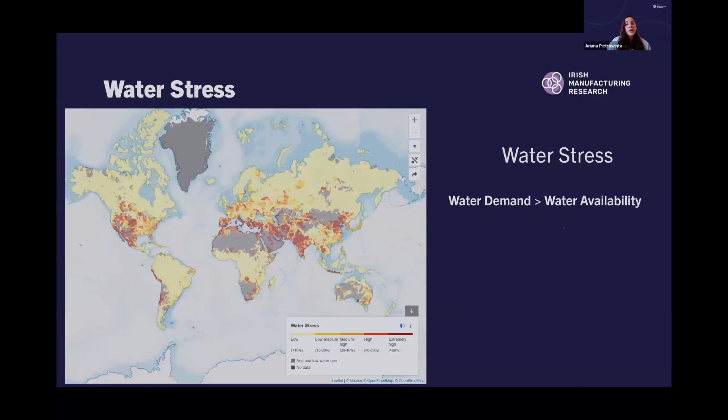Right now, too many regions around the world are living under water stress. This happens when water demand exceeds supply, making it difficult to meet basic human, agriculture, or industrial needs. The question is simple: when water demand is bigger than water availability, the result is water stress. Today, 2.1 billion people don't have access to safe drinking water.

Considering all these global challenges, the United Nations developed the Sustainable Development Goals. Specifically, goal number 6 is related to water, which includes many targets like affordable drinking water, sanitation, wastewater reuse efficiency, and ecosystem protection. Target 6.4 is particularly relevant for industry, as it focuses on improved water use efficiency across economic sectors.

At IMR, we work directly with companies to support these goals, making the invisible visible. Sustainability is not only about reduced water consumption, it's about understanding where the water is, where the water is used, how much the cost is, and also we don't want to talk only about cost, we want to talk about value.

Water intelligence means anticipating regulation, reducing operational risk, and improving efficiency. We work on three pillars: visualization, optimization, and excellence. To summarize, industry faces many challenges: climate change, supply risk, increasing chemical, water, and treatment costs, and strict license requirements.

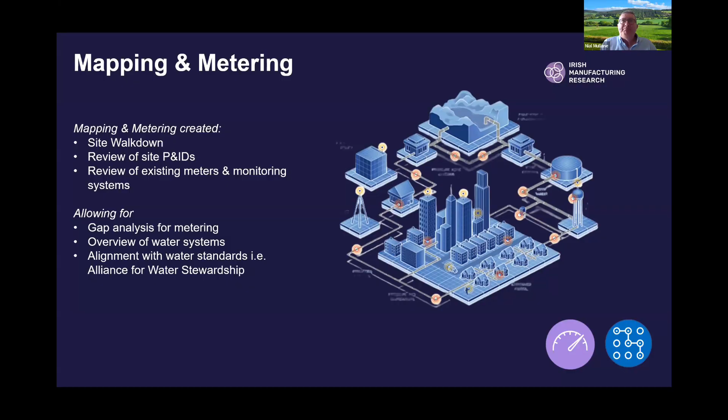We find as well, certainly in soft drinks and dairy, but also in pharma, that CIP is a huge user of water, and it eats into your total cost of ownership. If CIP is running too long with rinses and so on, it's eating into your uptime, the time that you're actually producing product. It's also producing huge amounts of hydraulic load on your effluent plant, and that is something you have to look at on true cost of water. You are actually treating everything that you're bringing in, pretty much what you don't send out in the product. So the effluent treatment cost is very, very high.

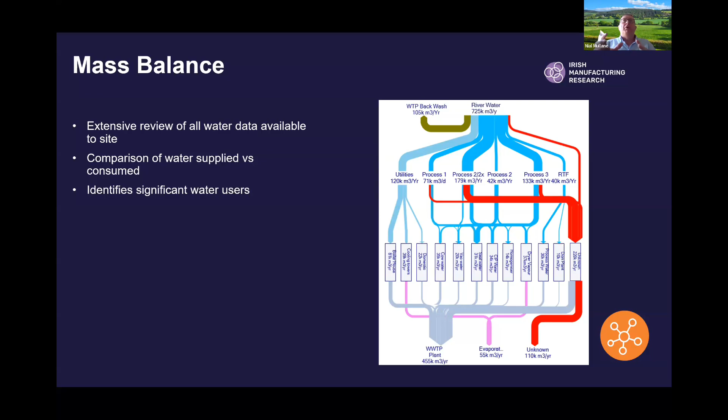You also find in some pharma plants where they're adding a lot of value to water by making it extremely pure, they're then just dumping that water to drain after it's been used, whereas there is huge potential left for reuse on that water. In pharma, it's very difficult to change processes because of regulatory reasons and because they're so tightly governed and validated. Therefore, the benefit really is reusing that water on a secondary or tertiary purpose.

So my final slide really shows you the different bands, which most of you are probably familiar with, of water at the gate from Irish Water. You're looking at usages up to band 5, you could be up to 250,000 per year at the gate. But when you look at what you're doing with that water, if you're running it through a reverse osmosis system, take potable water, you could be paying €5 a meter cube for that. But then you start putting it through RO and then chilled water, or even getting hot water and effluent. There's a huge package there of cost that we just take for granted.

Even if you're taking your water from a river and treating it, or taking it from a borehole, so you don't have the Irish Water at the gate side of it, you're adding an awful lot through treatment, through pumping, and also through heating and cooling. Eventually, after doing all those things with it, you're putting it back through effluent, and you're being charged roughly a third of your total cost by doing that.

So the true cost of water is a really beneficial journey. We've had great feedback in a lot of the companies we've done it for, and you're also embedding something there that they can continue on themselves. From a sustainability point of view, that figure of water visuality and where they can save water and cut back on water is a huge figure to be able to give them. So listen, thank you very much. At this stage, I'll hand over to my colleague, Eva McGuinness, who will continue with the presentation.

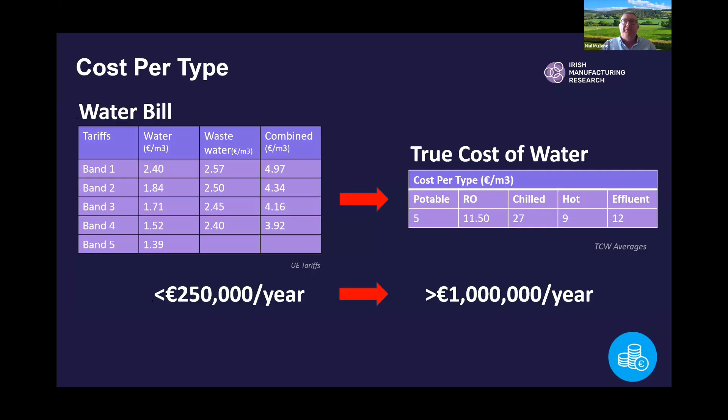As Niall was just saying, the true cost of water is an excellent tool for manufacturing companies to work towards their sustainability goals and water stewardship on site. Wyeth is a great example of the power of understanding the true cost of water. Wyeth is a Nestle infant formula plant based in County Limerick. We started working with Wyeth in 2019, as there was a lack of understanding around how much was being spent on water and a lack of visibility on the significant water users. Wyeth takes directly from the River Deel, as you can see in the photo there, in Limerick, so all the water and wastewater is treated on site. There was an understanding of the maintenance and labour costs associated with the treatment facilities, but many other expenses were completely overlooked. This led to hesitation to chase water-saving projects, as it was considered a low-cost, infinite resource, and the return on investment wasn't realised.

The leadership team on site were very driven to change the perception of water on site and to reduce the use sustainably, while also taking the community in the surrounding areas into consideration, as the withdrawal from the river was directly impacting them.

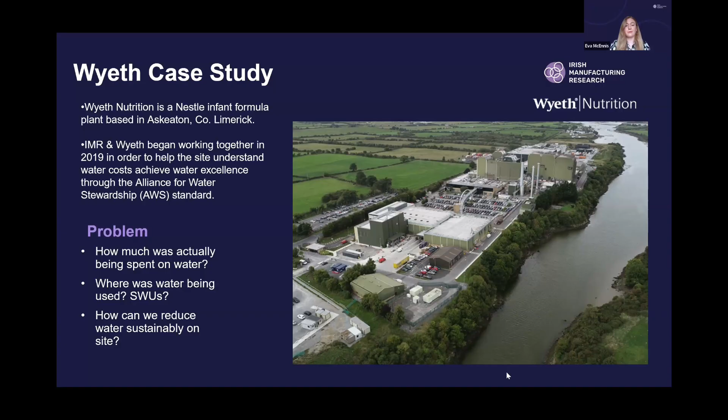So in order to deal with these issues on site, the true cost of water process was carried out, and this has been updated every year since then. This allowed for new projects to be highlighted.

Some of the projects that have been carried out include reverse osmosis reject reuse, CIP optimization, seal water reduction, and the Alliance for Water Stewardship was implemented on site. The Alliance for Water Stewardship calls for continuous improvement on the site's water balance and water quality, along with many other things, and the true cost of water helped highlight the areas that would allow the site to achieve these outcomes.

Just to highlight the first two projects here: reverse osmosis was identified as a high cost, high loss system through the true cost of water process. Although the site had installed a recovery skid already, there was still a high percentage of water being rejected to the drain. This water was then rerouted to an effluent fat sump for reuse on site.

It reduced the use of potable water by over 20,000 cubic meters a year, and it avoided the generation of effluent by over 7,000 cubic meters a year.

After the true cost of water was carried out, then the true cost of CIP was carried out, as CIP was seen to be a significant water user, using over 40% of the total water on site.

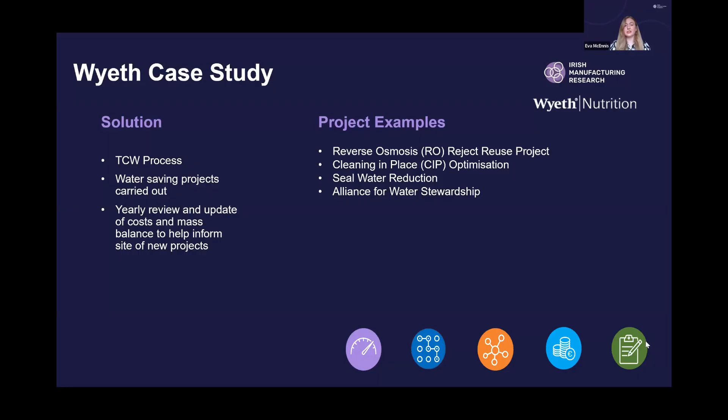Water was reduced significantly after the cost was realised through baseline surveys, verification studies, and lots of quality testing. The water was reduced without compromising the quality of the process, and not only did it lead to a more efficient system, it also gave process areas more time back for production.

As I mentioned previously, the Alliance for Water Stewardship standard calls for sites to continuously improve. It is a globally applicable framework for major water users to help sites understand and improve on their impacts, not only on site and within the gates, but also within their community or catchment.

After calls for Nestle to implement the standard, Wyeth started their water stewardship journey in 2019 and were certified to the standard in 2020. They were the first site in Ireland to be certified, and they have maintained their platinum certification over the last 6 years.

They've held platinum certification since 2020, which is the highest certification you can get in the standard, and they were also awarded the Sustainable Water Achievement Award at the Green Awards in 2024. They have been finalists for this award for the last number of years as well.

As we've seen, Wyeth is a great example of the true cost of water and water management. Through all the hard work and dedication to the process, they've managed to reduce their consumption by over 300,000 cubic meters, have saved almost €2 million, and have reduced their carbon emissions associated with water by almost 115,000 kg.

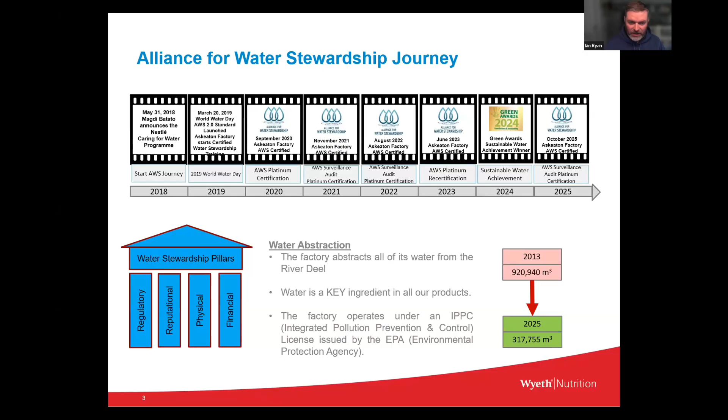So how it's applied in Askeaton - look, we do a lot of work with the community, we'll speak about that in a minute. We are technically in the River Deel catchment, but we're also part of the Shannon estuary. So the river you see there, as Eva showed a nice picture of earlier, to the right is actually tidal and estuary, and that's actually salty water. So we take our water above the village of Askeaton, 2 kilometers from the actual factory.

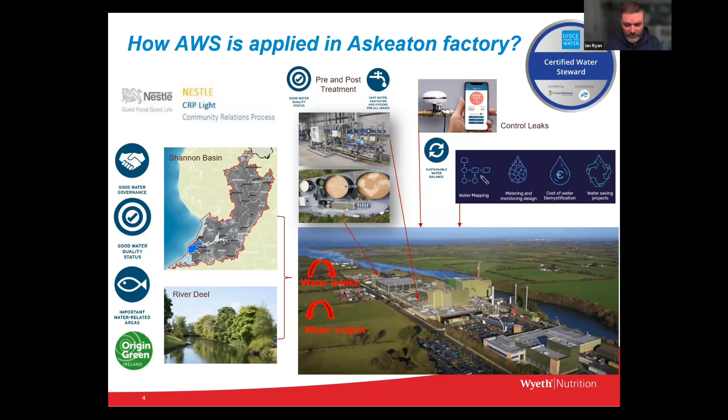Why connect with local stakeholders? What's the advantage to this? We're a major employer in the area. We are the very last user of water, effectively, on the river. So everything that comes down the 70 kilometers of River Deel arrives down to us.

Unfortunately, that river quality has been dropping and dropping and dropping over the decades. And I suppose there's a big focus now on trying to improve those rivers with poor water quality, and the impact of that - so like, why we're in there.

Concerns have been raised over swimming. There is a local swimming club in Askeaton - it's had to cancel, and it's been a good few years since it's actually run a regatta now. The river has recently got into trouble with cryptosporidium and other contaminants, and ultimately they're all driven by eutrophication. The sewerage scandal in Askeaton.

Yes, we would be aware, as part of the AWS process, of at least 8 points in the town of Askeaton where raw sewage is dropped straight into the river without any processing whatsoever.

Then another example here is the serious fish kill in County Limerick. Now, that wasn't the River Deel, but it was our sister river, the River Maigue, and they set up a river trust on the back of that. But we've seen other serious fish kills around Mallow and there in North Cork in recent times.

So look, if water is important to your business and you're abstracting that water, even if you're getting it through Irish Water, they're abstracting it from the catchment in some shape or form. It's good to be invested in that.

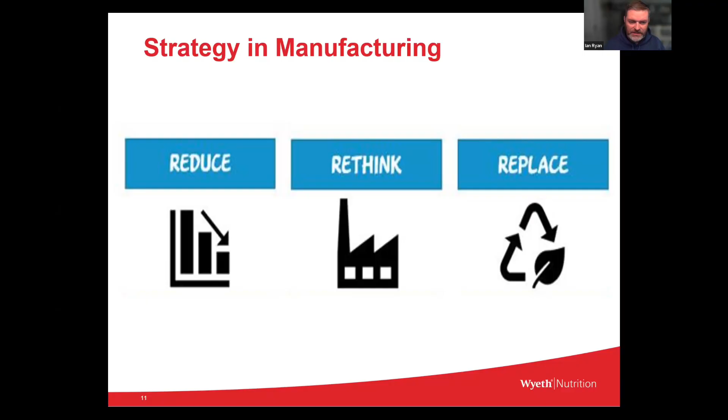The strategy for us on site is this: try and reduce water, which is the rational stuff. Then rethink - how can we avoid using water whatsoever or use different processes - and then ultimately replace. Is there any process that we can just not use water anymore in? Obviously there's some we can't and some we can, but that's the strategy, and it's a very simple strategy, and we build projects around that.

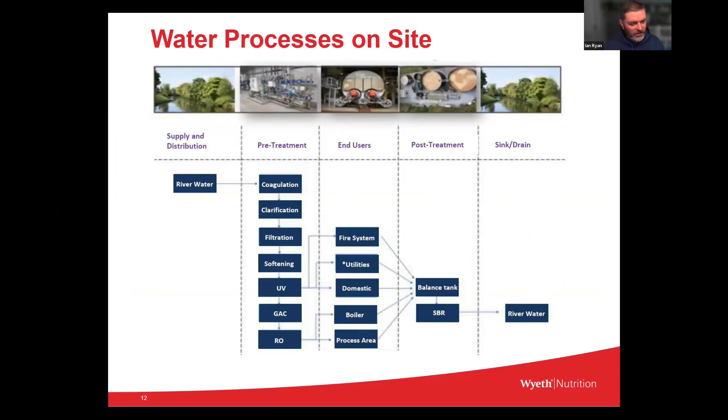The water process on site is part of the mapping that Niall and Eva talked about. A very simple map - we would have a lot more detailed ones now, but we started with this back in 2018, 2019 with the most basic map. I encourage people that don't have this to just start mapping out, not a P&ID, but a map of just big process steps, what is there.

We moved on then to the true cost of water. I won't dwell on this - the guys have it already well covered - but let's just say it was the most key thing in terms of engagement from senior leadership that we did on site.

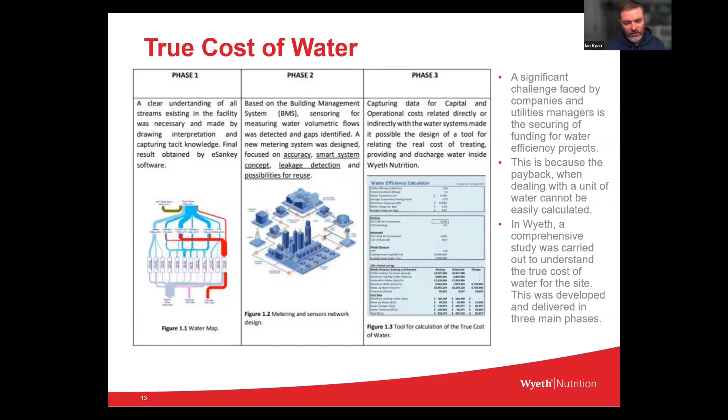Once we had a cost, we always did projects on water, but they never had a cost beside them. Once we had a cost, it was an enabler to get more funding, get more projects done, and even to get the resources to start looking at projects that were a little bit more involved. I can show you a quick example of them.

So we did these things, I'll leave these slides for you to read. Projects like water reuse - we haven't implemented this, but we've done the heavy lift and figured out how we break our waste streams on site to put us in a position to recover water from a wastewater treatment plant to reuse within the factory, which is difficult both technically on site because of the nature of what we make, an infant product, but actually a bigger problem from a marketing point of view - this idea of reusing water in such a sensitive food category.

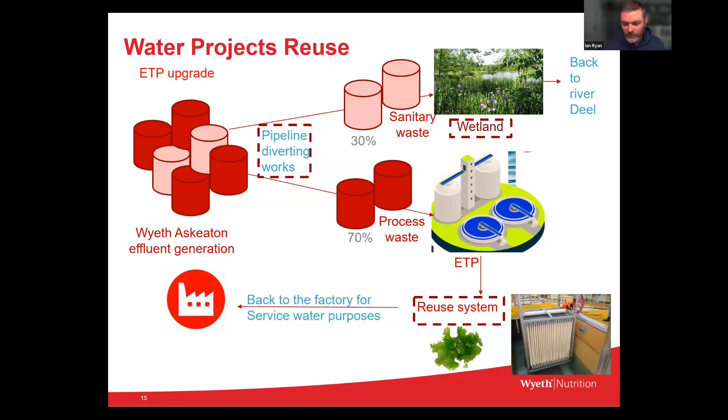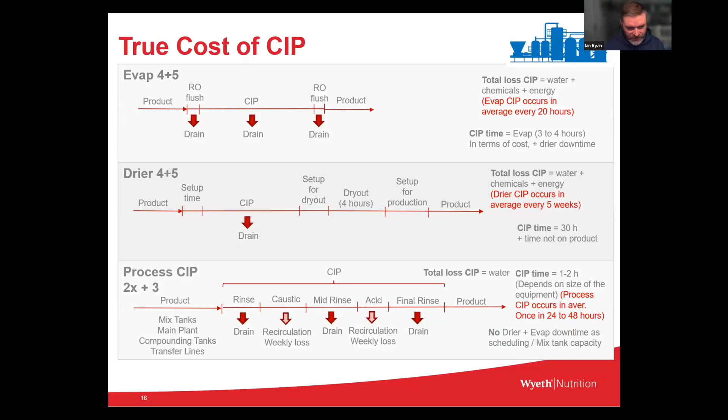The true cost of CIP, another project we did, huge savings on that, and indeed it is a process that can be reiterated and reiterated. You can run that process 3 or 4 times and keep making improvements in them. And that's it for me.

So I've got the slides in there on the projects, guys, so you have the bit of detail, and thank you for your time today. Great stuff, Ian and Niall and Eva and Ariana. Some really fascinating information in that. And thankfully we have this recorded so we can go back over it.

We have a number of questions in already, which is not surprising. So if the panel want to turn back on their cameras - Ian, this first one is for you. What was the initial trigger for you or for Wyeth to start looking at this, and how did you find IMR to work with? The initial trigger, guys, was very definitely corporate.

The head of operations in Nestle said that we needed to align to a water standard. We had been doing a lot of work on it, we had it kind of under the umbrella of ISO 50001 and using it there from a resource point of view, but we wanted to go further into the stewardship side. So Nestle said AWS is the standard, and we started working on that. There was a lot of work to do because it's very different from the ISOs - if you haven't done stewardship standards, there's a lot more grey, and a lot of our time and resource was spent talking to people, meeting people, selling the idea, getting engagement, making it very clear that we weren't greenwashing here. We were actually trying to figure out what the problems were in the catchment and trying to be a force for good within that.